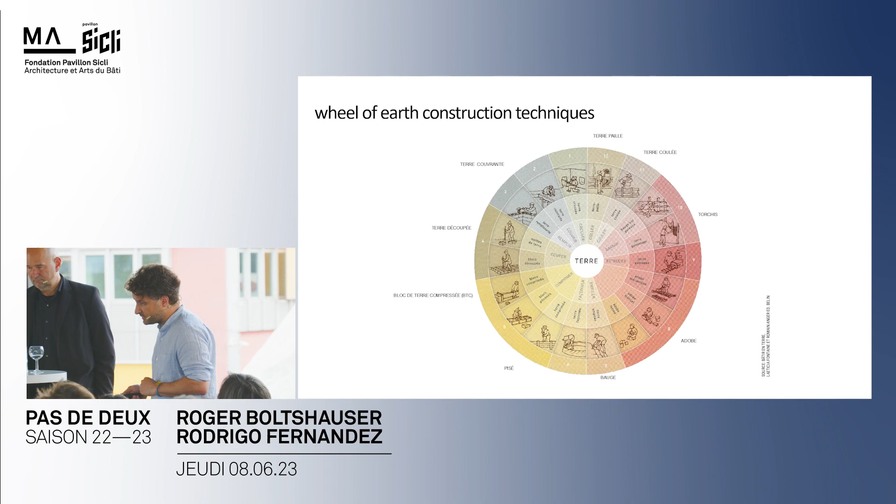Roger will talk about it, but we have good materials - sedimentary materials resulting from the erosion of glaciers over the last 1.5 million years that have come into the flat grounds. So we have good properties, a good particle size distribution with clays, sands, and gravel naturally contained in our earth that are extremely suitable for earth construction. This is actually a chance, something we really try to exploit.

Hello, thank you very much for the introduction. I hope we will do a good lecture together, because we just put it together very spontaneously, so we try to help each other.

So this is the course we do with our students from the EPFL - I was here in 2017. One point was what earth has to do with our culture, where it comes from, because when we did the Haus Rauch there were a lot of prizes, but there was also the question of what earth has to do with us, since we know it from somewhere else. Is it important for us in our climate zone? The second point was that earth is nice, but you can't do big buildings with it, so it has no potential to scale up - meaning it's not relevant, just a niche, nothing important.

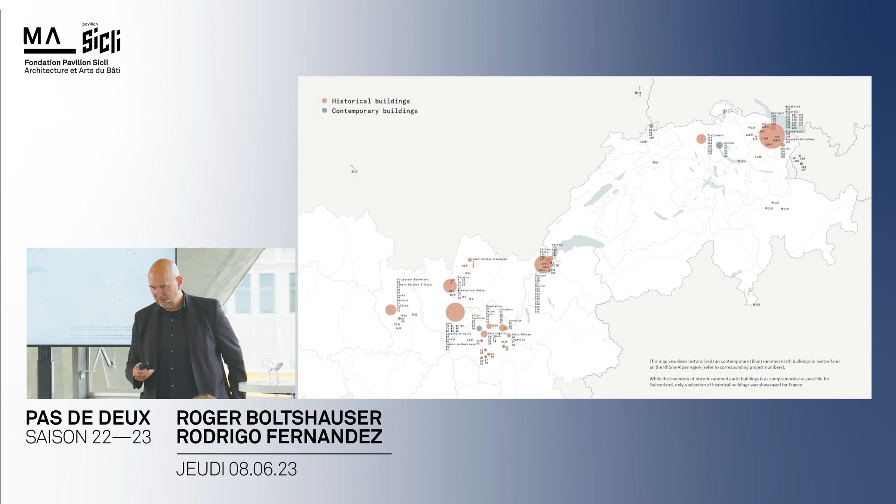Out of that we did a publication and a big exhibition at the EPFL, and we addressed the second aspect: we had an idea to scale earth construction up using pre-tension construction. That's the title, the cover title we did - together with Archizoom - a construction under pressure, with the idea of reaching a bigger scale out of the history of earth. You also see details we learned, like the corner details from Lyon showing how they stabilize the corners - little things we integrated.

Here you see a building we found in the region of Lyon - bigger than Ricola. The funny thing was it's around 200 years old, a farmer building still in use today. The picture is from around 2017. The people didn't let us in because they didn't understand why we were interested in the building, so we could only look around from outside. There are already guides who show buildings like that, but even the guides weren't able to get us in - meaning in a way it's forgotten, people don't understand what they have. We thought we had to do a publication - it's so amazing, so huge, and they did it by hand. It's an amazing building.

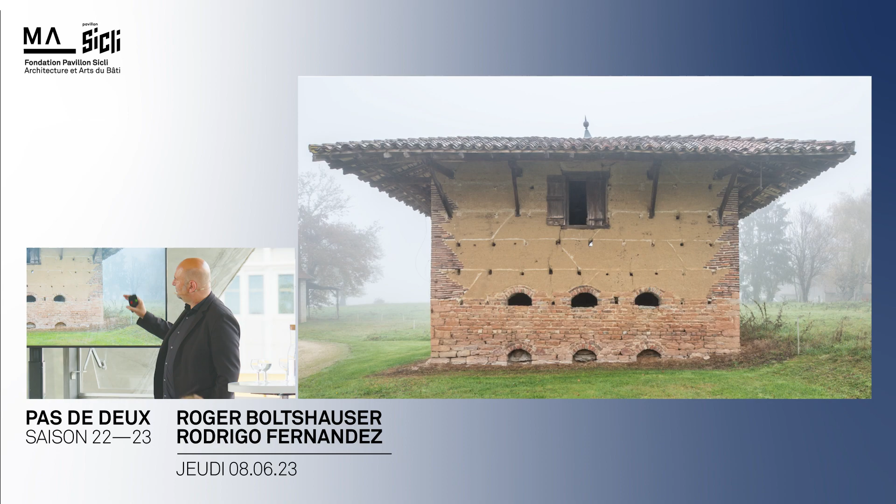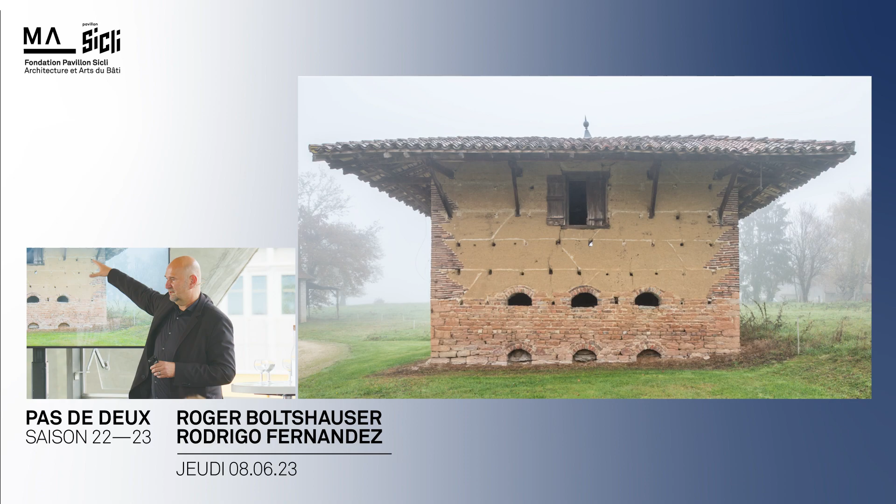Where is it better? This is a beautiful building, also a farmer building, also 200 years old - they keep pigs in here. But you also see how earth building is done in our climate zone: to have good protection you need a big roof, a stable base, probably nice corner details and details for the windows, and with that you don't have to cover the earth construction - it can survive 200 years. So if people say this construction doesn't work in our climate zone, I tell them go to Lyon and you can learn to study it. Of course.

They also have cuts, but in general the building survived there in a good way. So we were impressed by what we found. It's also extremely beautiful.

This is a little farmer house in Geneva, in Vernier, and it was also a funny story. Outside it's covered with plaster. We didn't see it from outside, we saw it from inside. And the people who live there didn't believe me when I said, 'Oh, you're great! You have an earth building. How beautiful!' Because the details, like how they did the formwork, it's clear it's an earth construction.

They said, 'No, this is old concrete, it's not earth.' But no, this is earth. They said, 'No, we had to take the windows out, it was so heavy, so strong, like concrete, we had to cut it like concrete.' We couldn't say anything, so okay, it's an old concrete building - but we believe it's an earth building, and they didn't trust us. We sent them a book, and I don't know what they think today about their building. But it's also a funny story showing that this construction is in a way forgotten.

And Geneva, beautiful.

Then we went back to Hauptwil. This is close to St. Gallen, a textile factory, 300 years old. We know that in the east part of Switzerland, everything is made with plaster. This is an earth construction here, but they go over it with plaster. This is a simple way to protect earth construction.

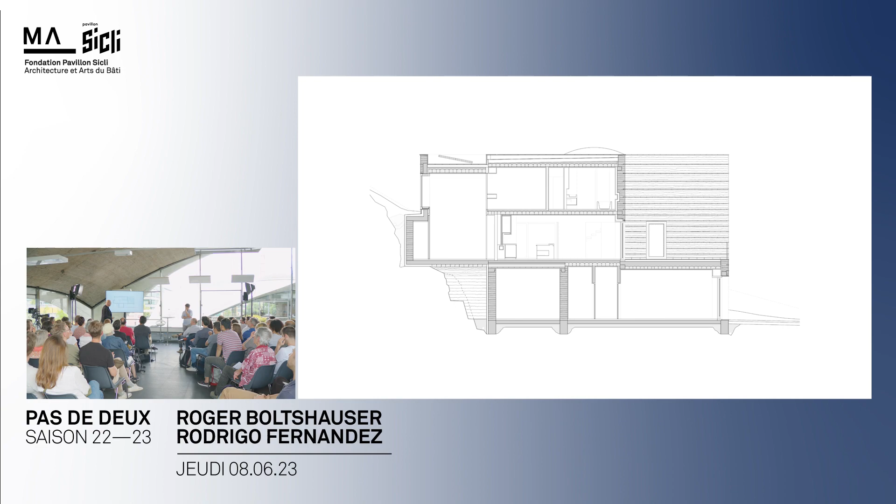One discussion was about not too many windows. He wanted to have windows everywhere. And I told him, Martin, we need these walls. I want to do one window per room. We have sometimes two. This one I didn't want to have. This is the only one I had to do because of him.

But in general, we want to talk about this wall and the materiality. So it was funny for us to talk with Martin, to tell him we need the wall and not the window, because you do walls and not windows. And the house is much better if it's more a strong piece of earth.

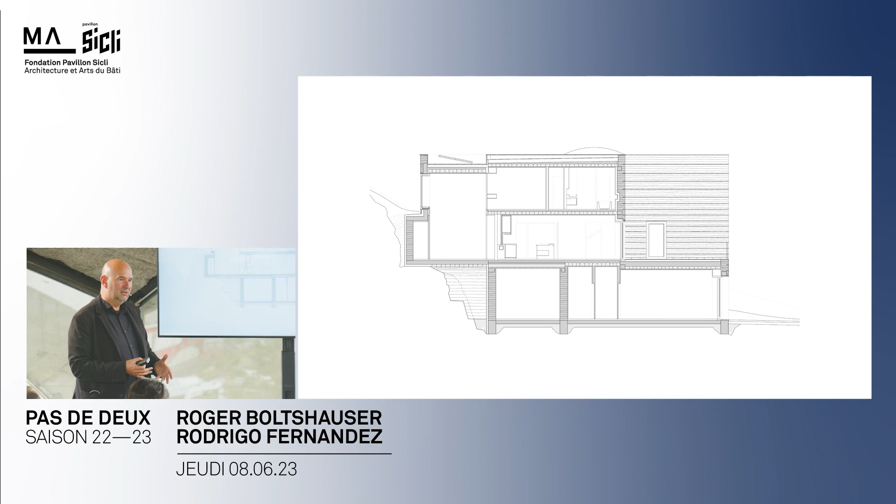So here we could really use the full excavation. This was great at the site. We did the excavation and we put it one-to-one into the house. You have so many cubic meters that you can use it also for other projects. But the mixture in Schlins, in Vorarlberg, in Austria, was perfect to build one-to-one in earth.

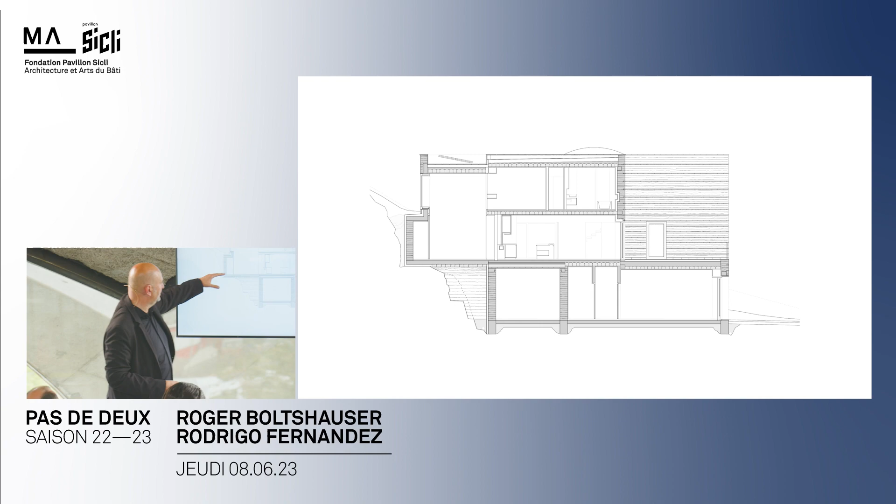The ceilings are made in wood; these are like real trees. We just cut them on the tree side and put them in. They're from the forest next to it. So it was really a big issue to use local material, don't use any plastic, nothing. We wanted to be as radical as possible.

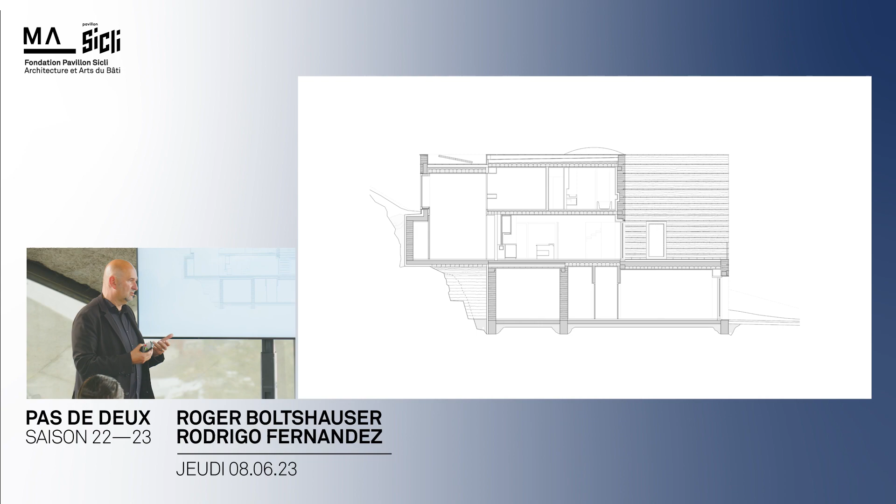Of course, for both it was very important to really make a statement. For him, after 20 years building with earth, to do the best he can out of 20 years of experience, and for us also, and of course we learned.

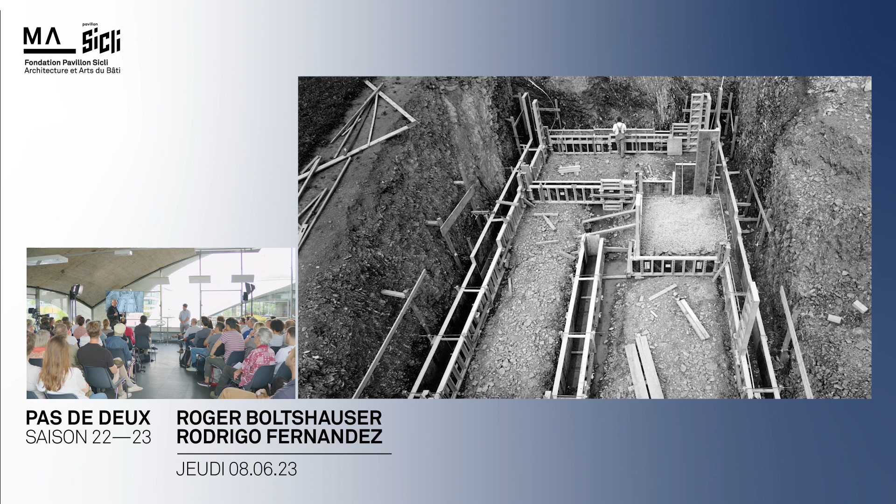Yeah, the building site, you see how you do earth construction. The frameworks are stronger than normal frameworks in concrete because the compression you have with the material gives a lot of force to the framework, so the construction has to be stronger. So it looks like a concrete framework, but a more stable one.

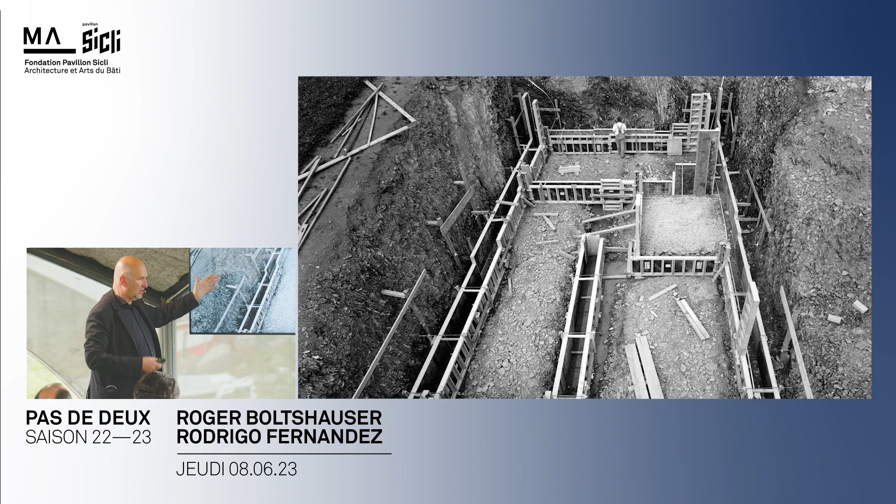So we came out of the foundation, we use earth. We come from the bottom, we use earth walls also, but we have to protect the earth wall from the water. But in general, it goes down 3 levels in earth. So this is the construction from outside. Inside we use some kind of straw insulation, then we plaster over it.

And what we also did is this layering. We want to do an abstract surface. We want to have the body. And this is a kind of reaction to have the water under control. This is a kind of dripping nose so the water can drop, so we try to save the surface in another way. He also did this system in his atelier house, which was older. So we made out of that the concept for the whole house, not just partially.

And we also played to have a better ending, a little bit more narrow in the middle, and then again a larger scale. So we really try to do architecture out of that. It's not just functional, it's also a design aspect.

And also the window, which goes deep. We want to talk about the construction, how deep the construction is, and we want to create a relation between inside and outside. This is the reason why we developed these window details.

We have different temperature zones in it. The staircase is not insulated, so because it's thicker, we have these round shapes. So we have the temperature plus minus under control. At that time, we didn't know exactly how good earth really is. So we just tried, because the insulating part is when you go into the different floors. If you go to the rooms, you have the insulation, but in the staircase, it's an in-between climate. The temperature difference was much better than we expected.

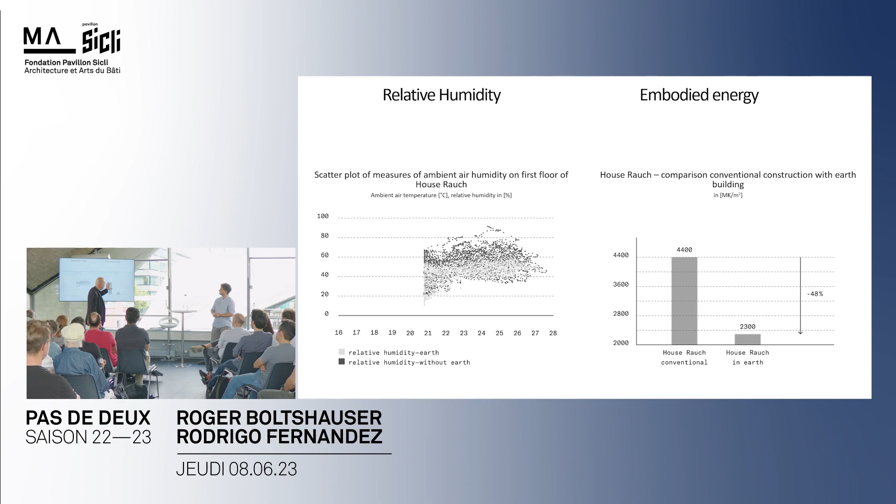After that, we started to do some research with the technical school in Lucerne, today the University of Lucerne. We wanted to know, because there was no real gray energy number. To be honest, this is really calculated, because Martin did all the calculations. Every shovel he measured, he really wanted to know. Every day he wrote it down in his book.

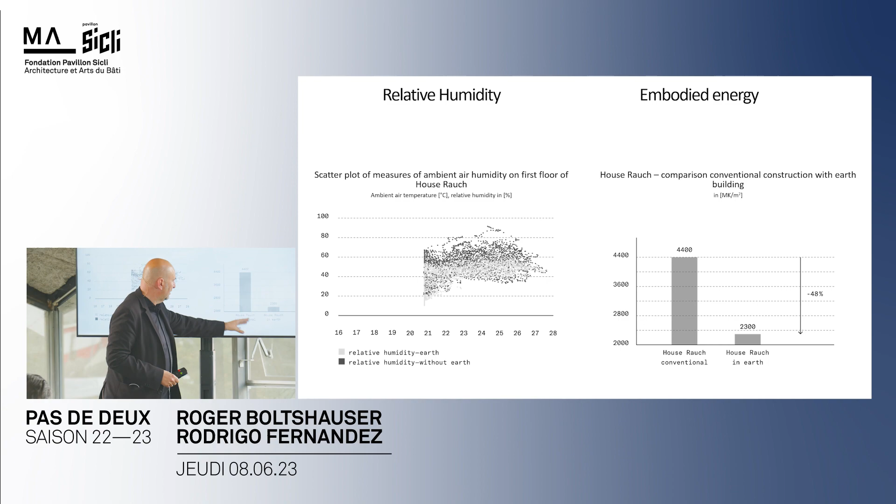Compared to a normal conventional brick or concrete construction, we save 50% of gray energy with this. We expected a little bit more, but with the real calculation, we also had machines and all the stuff. We came to a little less than 50%.

And we also found out that the humidity is in a very good range all the time, because earth construction regulates humidity, compared to a normal house. And we found out that earth could also help to have less building equipment, because you can regulate the humidity.

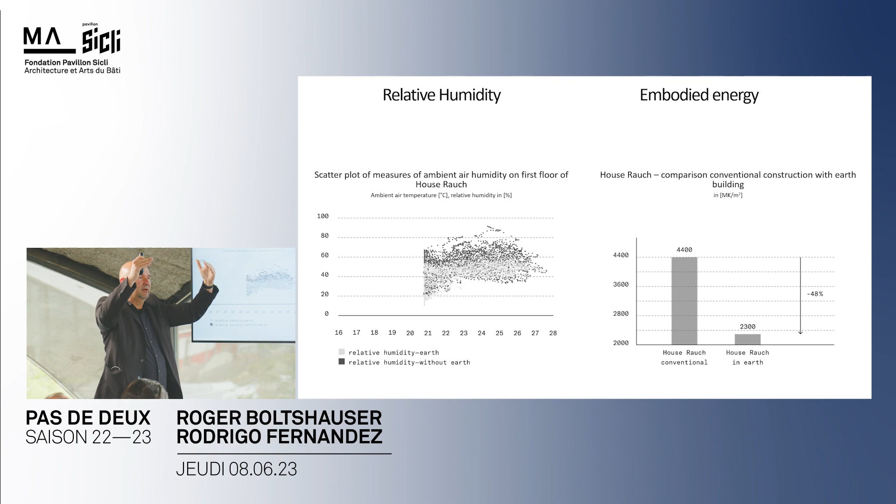This is something used today in hospitals: you can just do earth plaster, and you already have something which regulates, and then you can save energy. So we already have this energy aspect in that construction. Later we did much more with this aspect.

Yeah, it's your turn now. Too long? A little bit. Okay. But don't worry. Too many stories. We have a lot to say. I will be faster, don't worry. Okay.

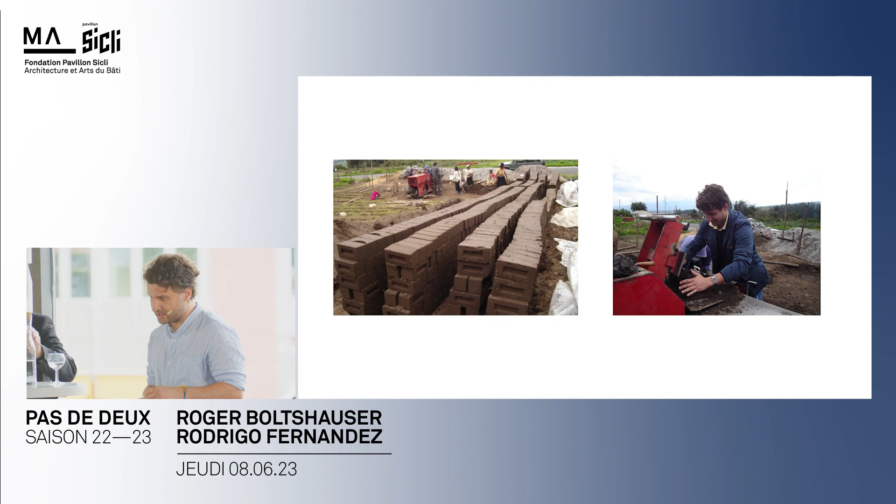Anyway, so we are now stepping into action. How did we actually start with these earth blocks? I had the chance for my diploma project, at the same time as Haus Rauch, in the 2000s, to go to Africa to work on these blocks, to discover this technology from an engineer's perspective, a material scientist's, looking at the properties of different soils, and so I had the chance to really learn from these experiences in Africa.

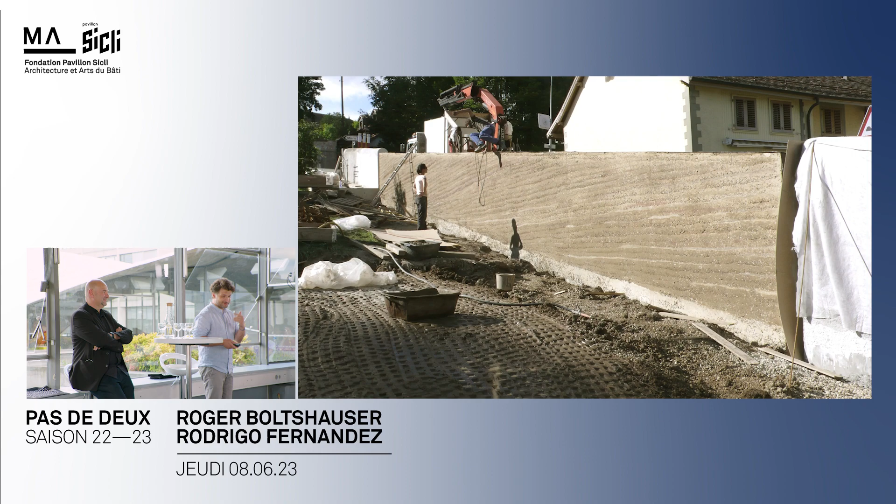This is an experience that Laurent, with his former architect's office, Terre, here in Geneva, did. This is a rammed earth wall, and he invited Martin to do it, in the same years that he was doing his house. He came a few days to Geneva to do this wall. And we learned a lot from a very small construction, modest, but still very beautiful and still standing.

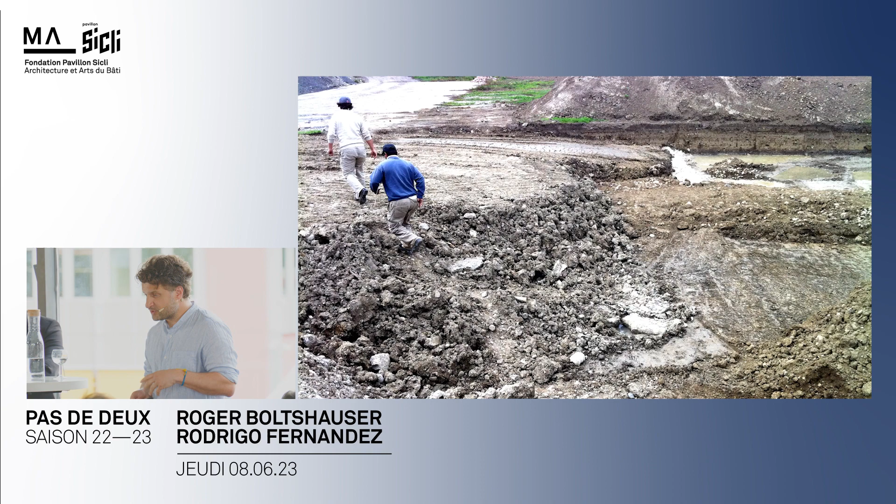You can visit it. So the idea really was to learn, now from local materials, and to start pressing these blocks with some funds from the state of Geneva, which had given us a prize for sustainability because we presented the idea of compressing earth to make blocks, rediscovering this technology. And we had the chance to build with Laurent's former Terre office a first construction in Vessy, la Maison du Futur, where we did our first blocks and first 200 square meters of compressed earth blocks.

And this is the result. So we were very proud. We took a lot of security, as you can see. There is a good basement. There's a big overhanging roof. There is a bit of cement in the blocks. So if you go there, it hasn't changed in 7 years. But this is how we really learned.

And we also had the chance to organize here in 2017 l'Art de bâtir la terre, invited by les Monuments et Sites of the city of Geneva, where we invited all the practitioners, all people in the French-speaking part of Switzerland to teach and to show what they could do.

So it was a very interesting 3 days with conferences, and we had the chance to receive Roger as a lecturer. And this is the first picture where we meet, and we talk about earth construction, and he talks about his experience, and it was a fascinating moment. And from then on, he started to design also with blocks. So he had this huge experience with rammed earth.

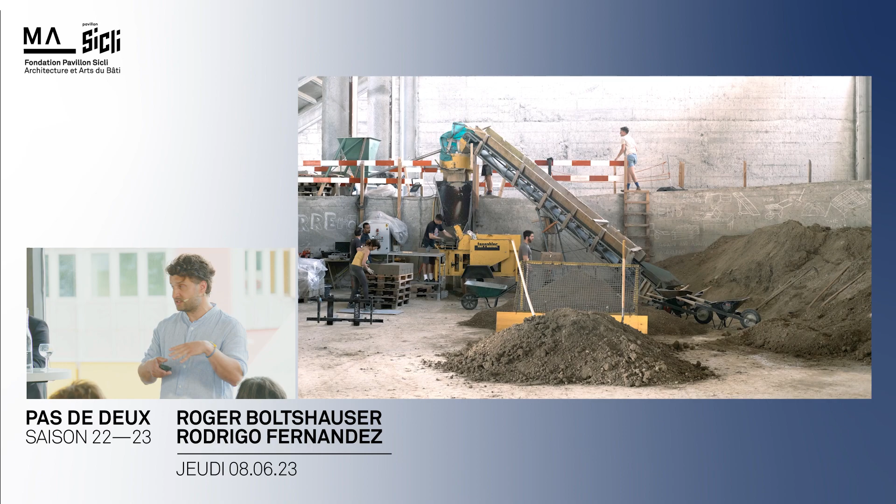And there you see the earth coming to Brunnen and ready to press with the machines, with conveyor belts and stuff, and I want to show you a small video of this moment where we were during 3 months, also with students from Roger, students from us, from Fribourg, and with Felix in this ancient cement factory, producing the blocks and producing also rammed earth.

So sorry, it takes a little bit of time to load. I'm not doing advertising for it. It just takes a little bit of time to load, from what I've heard. Yeah.

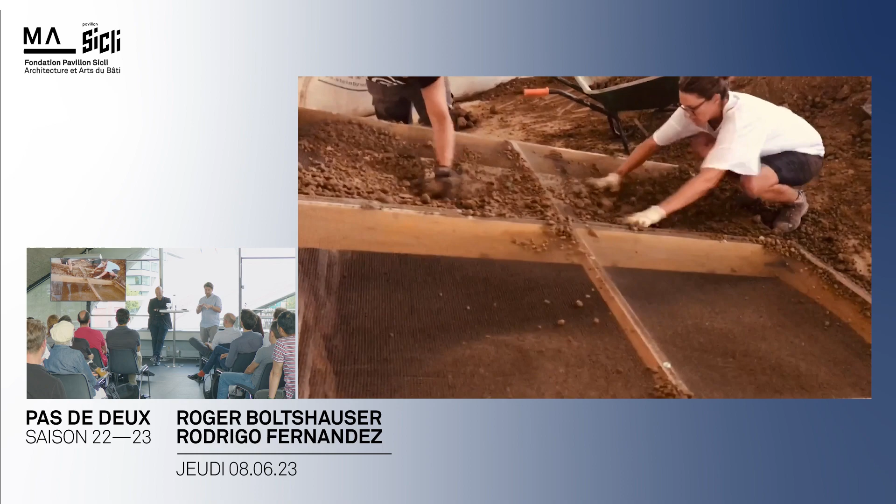So there we are sieving the materials for the mortar, because we are putting 30% of fine earth into traditional, conventional lime cement mortars to do the joints between the bricks. So this is the sieving process. It takes a lot of time because you need earth that is very fine, maximum 4 millimeters. But we only had to do a few big bags, and then you see we had like 150 cubic meters that came from the construction site.

They were supposed to be already sieved, but we had big lumps, so we ended up doing a lot of handwork to actually break the lumps, remove the lumps, and we had a prior sieving process that you see here, this time not for the mortar, but to produce the blocks. So there we see Felix doing the sieving part.

Have you seen this video before? No? Okay. It's the same movie maker. Sorry? It's the same movie maker. We did. You have another? No, it's not the same movie maker.

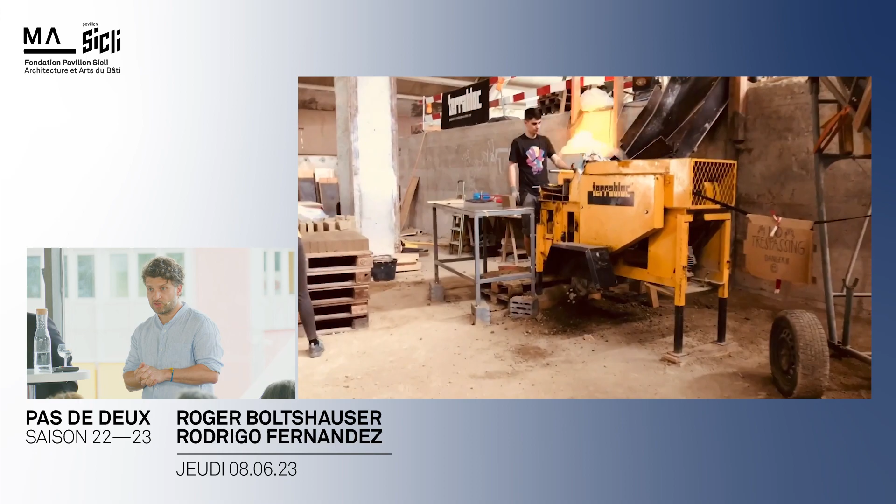Anyway, so there you see that it's really actually time-consuming, and we produce from this size of block that you will see around 1,500 bricks. That represents more or less 50-60 square meters of blocks per day, producing like that. And we are protected from rain. We are in a perfect site. And this is the small press that's still working today, that allows us to build as simply as possible. So this is the mix going up there, falling from the mixer, and we'll see how he presses, and then we'll go on.

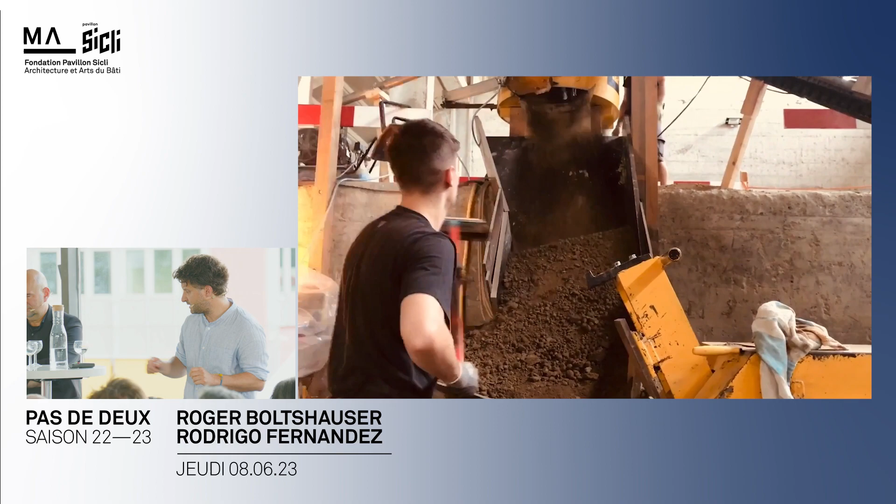So this experience about really sharing our knowledge with Lehmag, with Stampflehm, we were also doing rammed earth, and at the same time we were producing the blocks, and all these blocks were produced for two of Roger's projects that he will present.

Okay, so now it's your turn to talk about what you did with these bricks. Yeah. I think we also invited you to the EPFL, so we had a discussion about this at the same time. Yeah, it was also part of the discussion and exhibition at the EPFL, so it was really the starting point, 2017, and also here was great.

So yeah, we found it interesting to go on with other techniques, but in general it's the same but smaller. We have to say it's a little bit easier to sell earth blocks than whole pisé walls, because, and it's stupid, but in a way it's a simple aspect: if they are smaller, they really look like bricks. So the way to the client is a little bit shorter than if you say I want to ram.

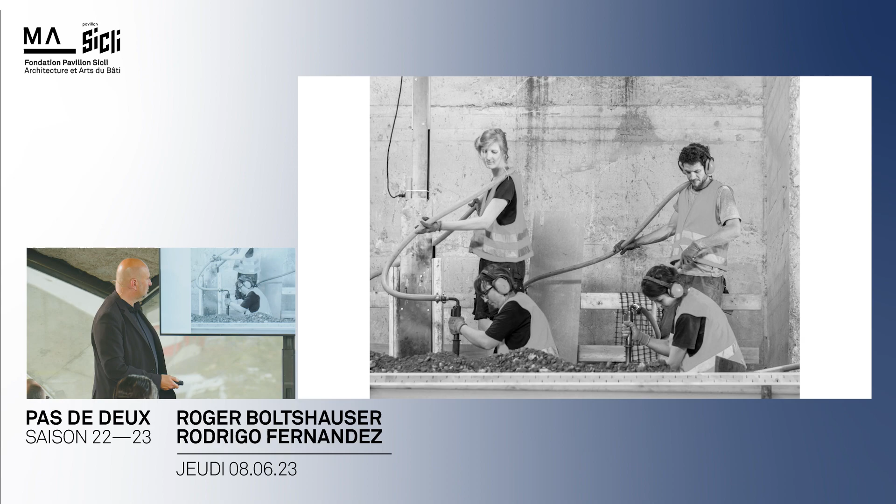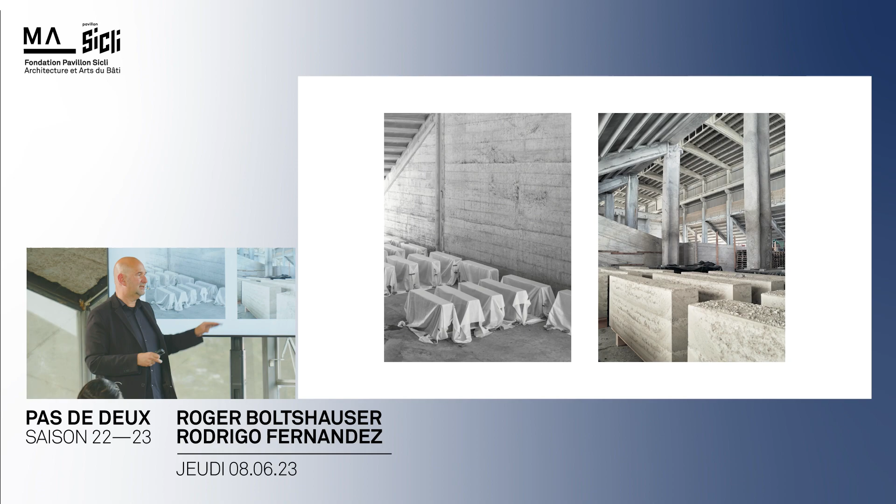Oh, it's already the construction site, so I'll go back a bit. They don't only want an old brick factory; they also want to talk about material. They make bricks, and they asked for an unburned building. They saw our mock-up at Sitterwerk when we produced it and had the idea to do something there. I took this project from the EPFL to TU Munich, and they wanted a kind of tower from which people can see the whole protected area, a beautiful landscape, a building that looks to the future, not backwards.

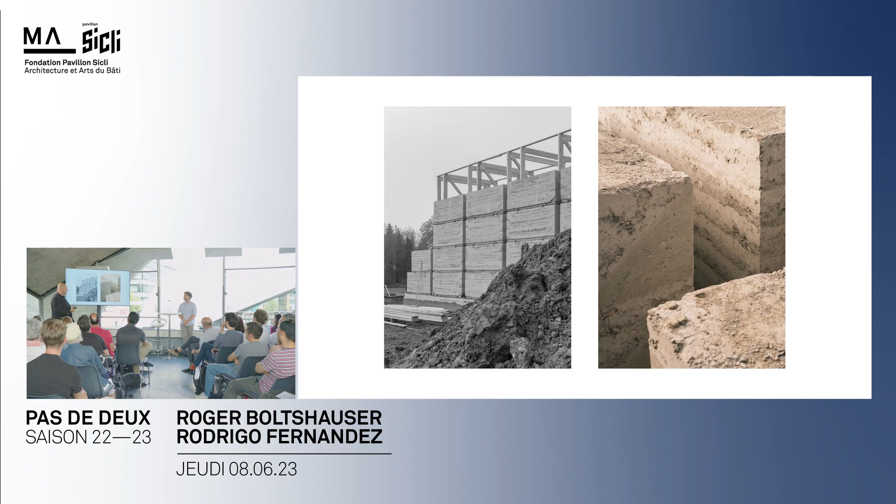What we designed is also this pretension construction, again a learning from the EPFL. We prefabricated these rammed earth walls, and we also used Terrabloc. You see how we produced the whole building only with students: 30 students in Munich, then I moved to the ETH and another 10 to 15 students worked on the plans, and another 60 students worked on site producing the big blocks and the smaller Terrablocs.

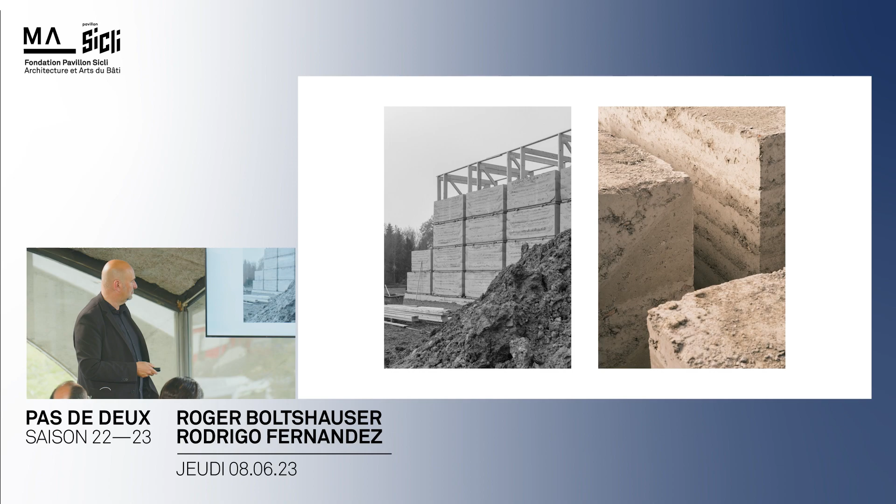After producing them in Brunnen, we built it very fast. In 3-4 months the building was ready, made with this pretension construction. Here you see the learning of EPFL and of St. Gallen Sitterwerk: each element stands on itself. I will talk about the problem later. The pretension didn't work so well at the first mock-up in St. Gallen, because the construction shrinks a lot.

So we always have to do it again to make that stable. And here we have some kind of springs which permanently bring some pressure on the construction. And the idea was also already in the EPFL to attack the second point. The second point was this building, this construction, it's not an answer for density, it's not an answer for a bigger building. So we try to do a construction which comes to a bigger scale.

So we have here a building, it's 9 meters. The EPFL mock-up was 6 meters, and the construction really works. We measured that, and we calculated we could come up to 40 meters. It doesn't mean that we have to, but we want to talk about the potential of earth construction. And today with this earthquake aspect, Yemen is 7-story high, but it's not an earthquake. In an earthquake case, it doesn't work with our rules, but this would work with our rules.

So really to attack the scale and to say it's important that we go with this material, we will find a way, even, to be honest, when we are still at the beginning, so we did that. It's a kind of big mock-up, but it's also a platform to talk about the surrounding. It's a beautiful space, and it has an oven in it. And the oven is a kind of second layer, and this is made with Terrabloc. So here we did something, a combination.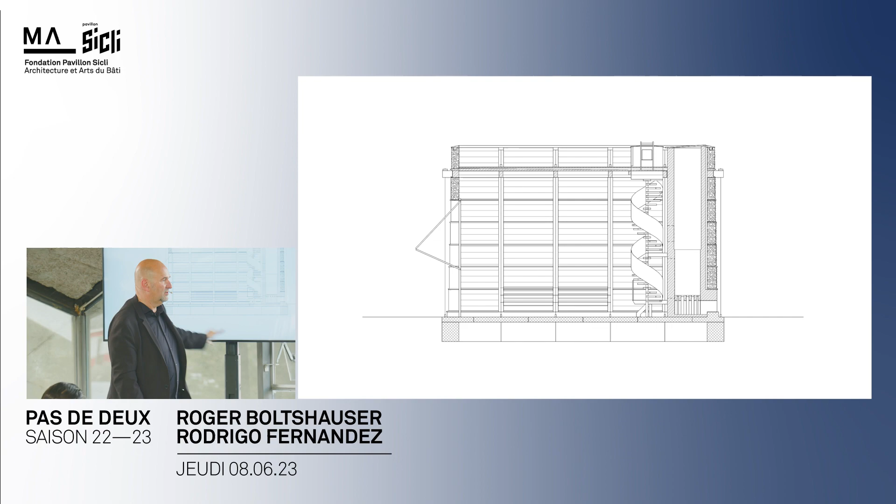We found it also beautiful to have both materials, kind of oven, because the old oven they have in the old factory doesn't work anymore because it's a wood building and the fire police doesn't allow them to burn, so they can do no schooling, nothing. So the students from Munich had the idea to do that so they can burn stone also to show how it works. They have the material there. And they also have an unburned building. So it's really about the past, and it's also about the future, and it's with Terrabloc here.

So this is also interesting, the circularity as an important aspect today. Because normally, if you talk about circularity, it's light building, it's steel and wood, it's not earth. But we find it very funny to have a very heavy building which is circular. And so we did it, and also the pretension construction helps to make it circular, because each element just stays on each other, and it pushes it down.

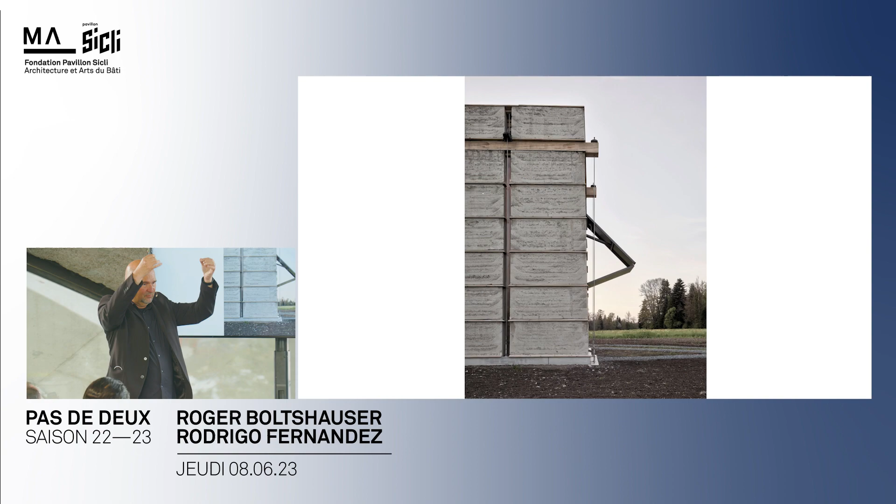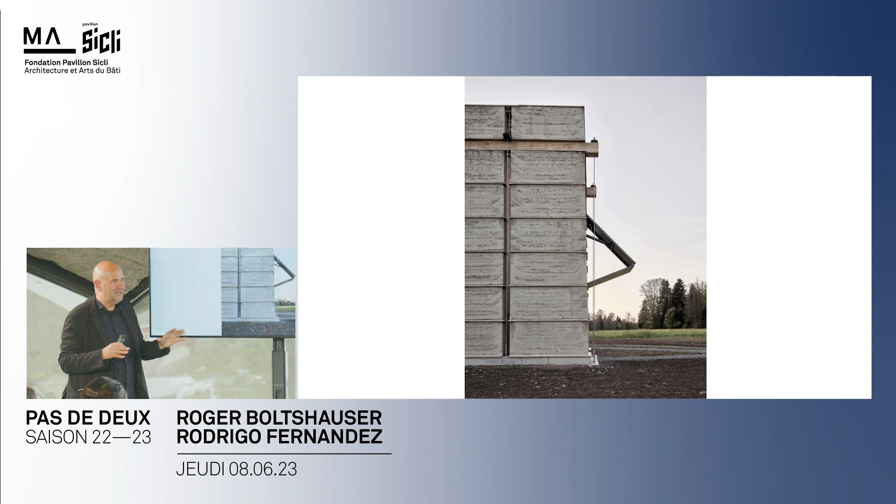To be complete, in the EPFL we have Terrabloc there, but we also have Martin Rauch who supports us with this idea, and we have Jürg Conzett. And Jürg Conzett is a specialist of pretension construction, and maybe you remember Hanover, the pavilion from Zumthor, with the wood layers and the pretension construction. In a way, it's the same system. So he was completely excited, but the idea comes from students, not from us. So Burgi, a French student from the EPFL.

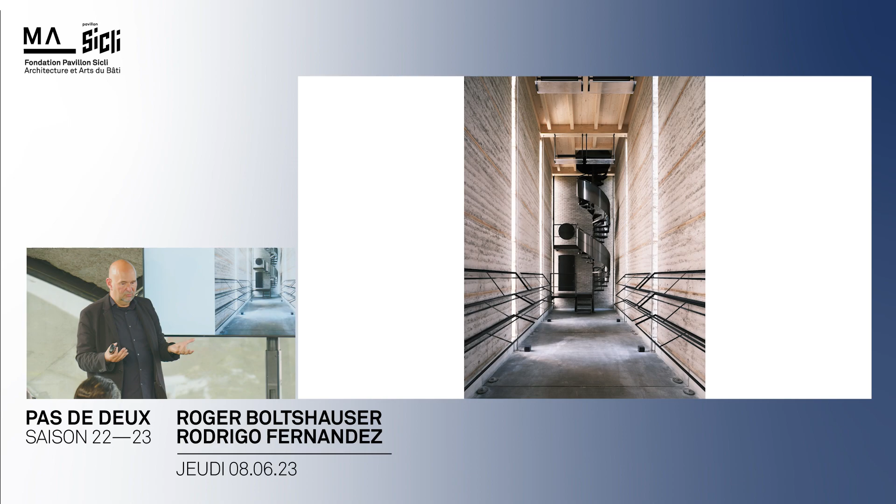So inside, you see the Terrablocs, the way up, and we use the cable also. Both sides there are cables. We use them to do also the exhibition, so we use them in several moments. And you see all the foundations, we just put them in. We have some nails there to take it out, so everything is circular. Yeah. Oh, it's still my run.

So the second project is a newer one. You know, this was a kind of special project. We have a great client who just wanted to have that because we have a brick museum and we have a big fundraising. The government gave us money, so it was kind of, you know, a special frame to work in. Here we have a housing project in Kilchberg.

You talked already about the earth. It's in an upper segment. If you look down here, you have the Lake of Zurich, so it's very high. It's an expensive community there. It's an expensive place. You can save a lot of taxes if you live there.

It means the rents are very high. So we had the idea to do something in earth, and we did a combination with earth blocks inside. We did a double layer construction with a reuse brick facade outside.

The structure and the roof are in concrete. You have some concrete columns, and the fillings, the double layer construction, is earth and reuse bricks. And the excavation we use is from the site.

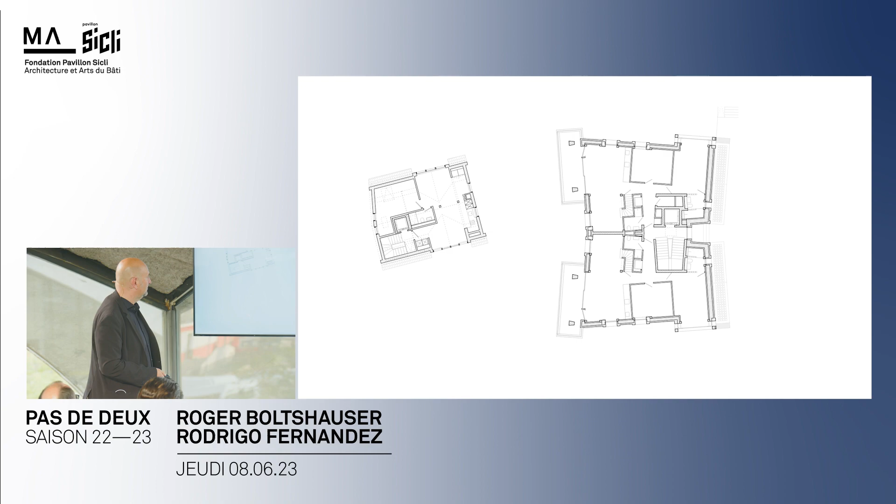So, and this is the result. You see the Terrabloc, you see the structure, and of course we have some loam ceilings with plaster. So we integrate it, and I have to tell you, after 2 weeks, everything was rented out. So we were, yes, the people are ready for this construction.

We don't have to be afraid. And even if the surfaces are a little bit special, we have to tell them the nails have to be not in the stone, they have to be in between. And with all this aspect, they like it. And they're proud to be there.

And it's nice that this material comes really to the people, and people like it. So it's not something like freaks like us who just like to work with that. It's really something people want. And this is, I believe, the result.

So now, with this small project of 7 flats, we show all the clients we have and tell them: look, it's possible, you can rent it out, it works. And we attack the bigger scale together.

Again, the sleeping room. Of course, we have some special details, you know, because we can't do that in the wall. We can only do 20 centimeters, and you go out, but it's also beautiful. You can do architecture out of that.

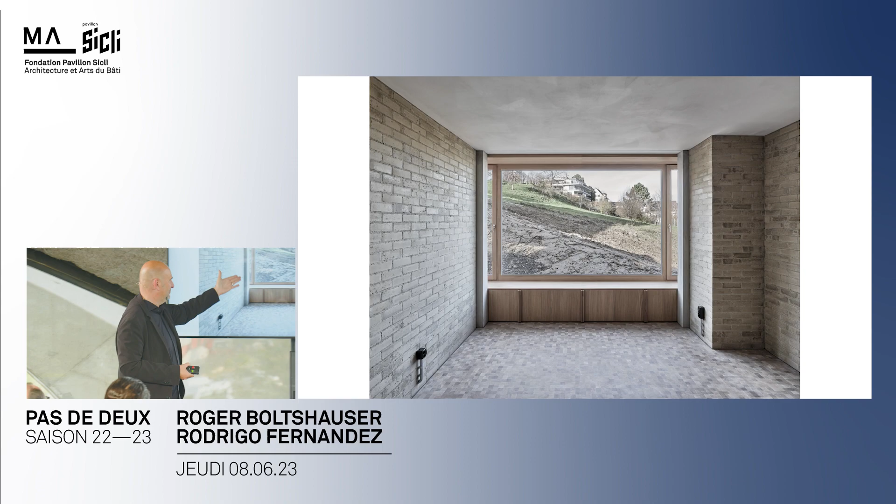And this is the material, and this is the wall. It's extremely nice. Kilchberg is such an expensive community, but you have the perfect material to build in earth. It's also strange in a way.

And we also did the staircase with earth, so there was also a discussion about whether it's too fragile, you know, if you go up, but we thought it's a beautiful atmosphere we can create with this material.

Yes, and again, the top flat which goes to the roof with these earth blocks. And it's a kind of Maison Dom-ino, you know, Le Corbusier, and then you do the fillings, and it's the same system.

It's not the Haus Rauch in that sense, it's not that radical, but it's a way to try to do a smart hybrid construction and come to the client. It's really coming to the market with this material, and in that sense, it's really a try to come closer to the market and closer to the client. So still for us, after building Haus Rauch 20 years ago, it's still a big step.

And this is probably also important for you to know: it's not easy, it's not a home run, you know, to go on. No, but we are there, you know. We will show the bigger ones now. Okay, it's your turn.

Thanks, Roger. So now the chapter on how to democratize. Well, you've seen this handmade production. This took time.

This takes energy, this needs money. We had to hire students to do all the blocks, and people cannot always afford producing blocks on site. It needs to be really a collaborative project to make handmade blocks. So actually we were struggling, financially struggling to try and make something run and democratize this product.

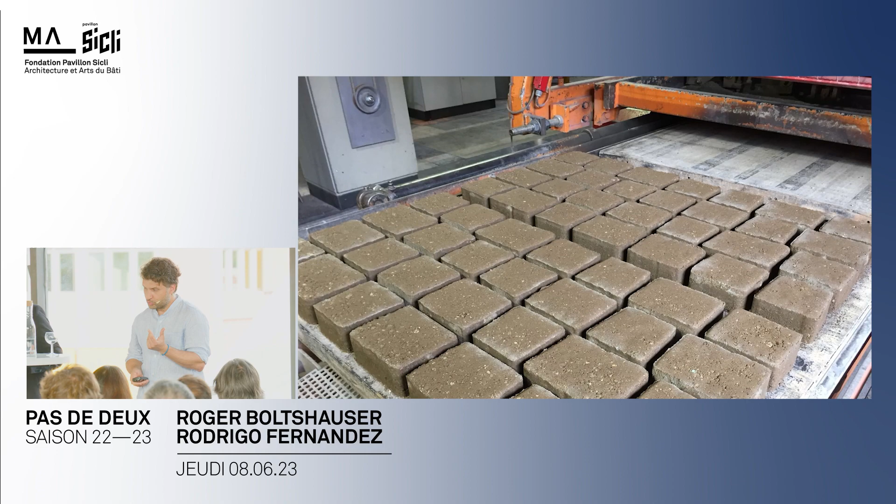We had the chance to meet a family-owned company, so we decided to try with an industrial factory. It's a press that makes pavements to make earth blocks, and it worked. Then we could invest in our own forms to make compressed earth blocks, and that was very important for us.

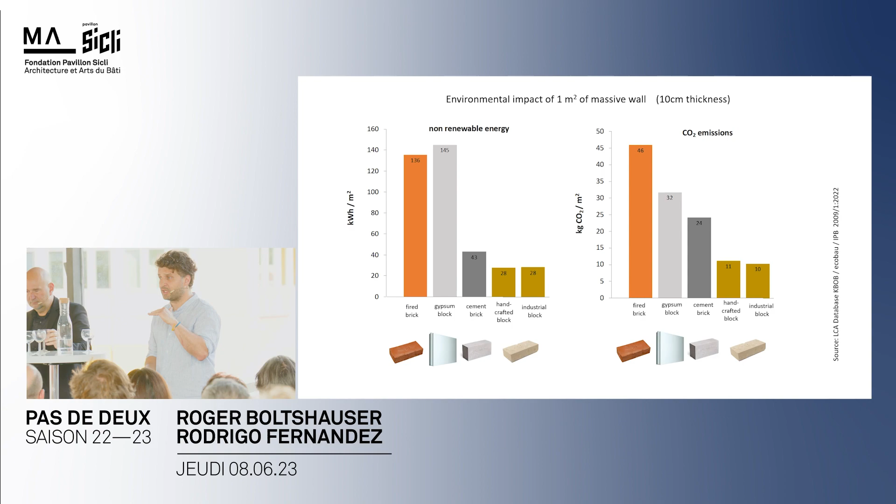We wanted to show only these two things: this is the life cycle assessment of a handmade block, and this is the life cycle assessment of the industrial one. This is in non-renewable energy, and this is in CO2 emissions. So for us it was very important to show that by upscaling the production, we were not moving in terms of environmental impact, and we could scale up.

The gain you have in production per day in yield, even if you consume more energy per square meter of wall, it's the same. And so it opened the door to different products, opened the size of the bricks to make load-bearing walls and more complex shapes.

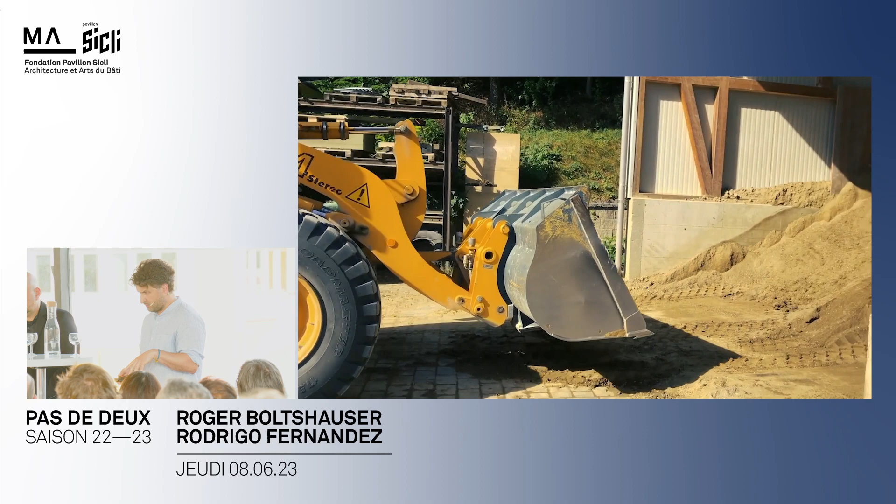And this is how - I think I will skip this video, because this is just what you show when we produce industrially. Shall I keep it? No?

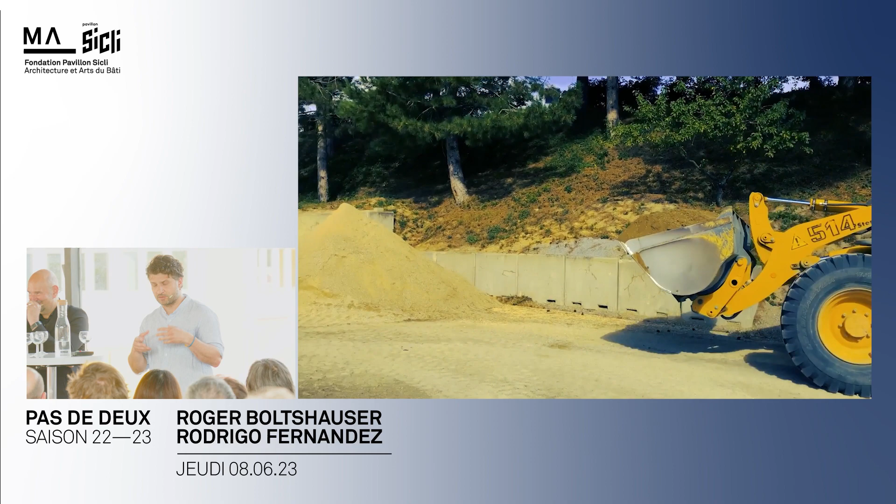On avance? Okay, so this is how the excavated materials must be sieved and prepared. So what you see there is a bunker where we have 300 cubic meters of earth. This is our stock, and we need to renew it with local excavation. And it goes down in the factory as if it was stone to make a concrete pavement, actually.

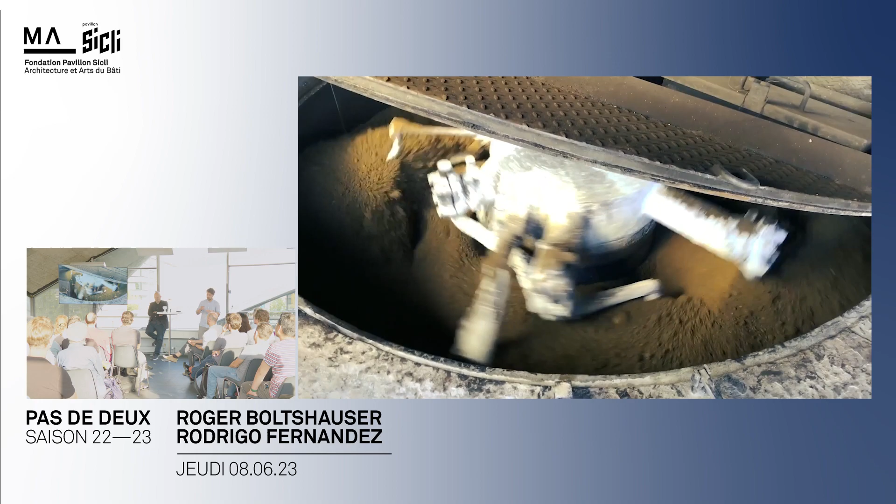And there you see big vertical silos. We cannot fill them up, otherwise with earth it gets stuck. And this is the mixer where we put 3 to 5% cement, depending on the application. We put a bit of stabilizer, we put water, and then it goes through a conveyor belt to this machine.

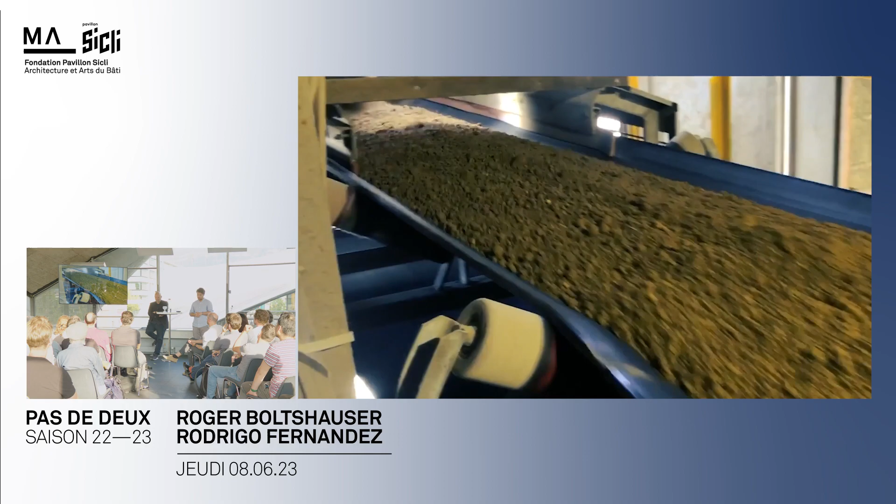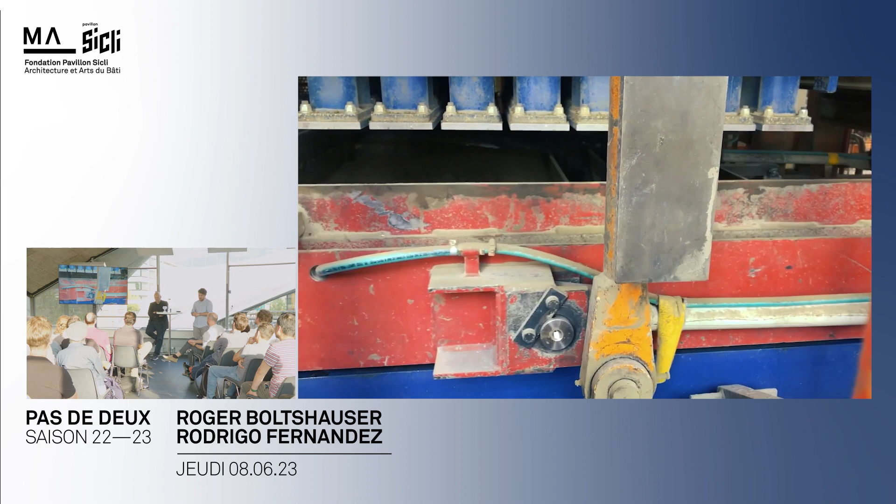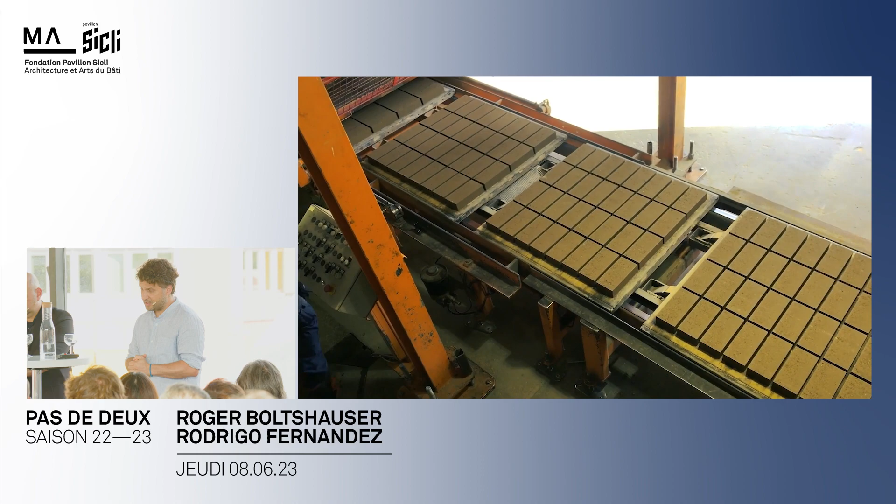And this is how it vibrates. The technology is a bit different — it's a vibro-compaction. It's not only pressure, it's also vibration that rearranges the particles to make them denser. And there you see the results of the blocks coming out. Basically that's the way we are able to produce now, to try and democratize.

And what you did again now with these blocks, you can show us. We are really one of the first who built with them — not really, nearly close to. Let's say in the German-speaking part, yes. Okay, so we have some good architects here that already built with our blocks.

We found this technique of the double skin facade with Terrabloc inside and brick outside. We found it interesting, and we really went to the market. We designed this house here — a very small hotel next to the station of St. Gallen, together with the company of HRS, which you know here.

It's a really general contractor — we're just under them. And it's also for the Pensionskasse of St. Gallen, so it's really a serious client. We want to do something special with them, so we asked them to do a double skin facade with earth blocks inside.

So we used this Terrabloc, and I believe it was the first time. It's also 35 meters, so it's a skyscraper, a small one, but it's a skyscraper. It's the same principle we did in Kilchberg. This is the structure outside — again a concrete construction. We have this double skin facade, and we have many inside layers.

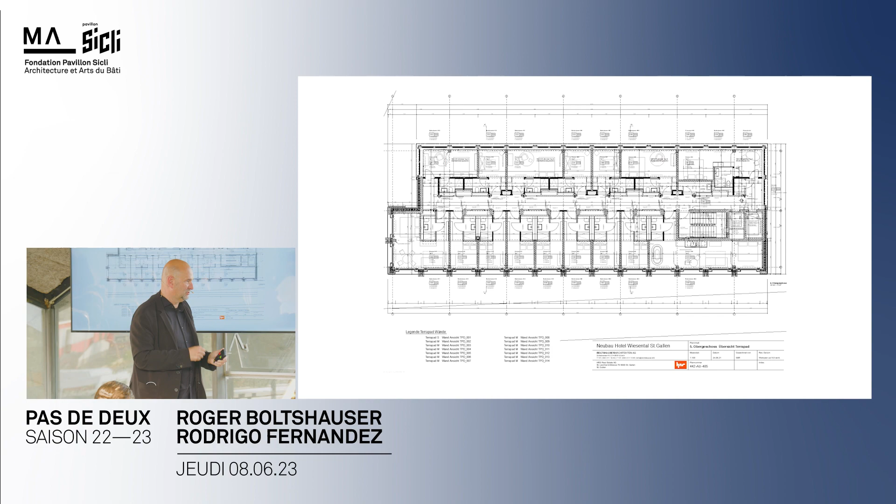And we have young hoteliers, around 35, who really wanted something special, something new. They helped us a lot to go with this. There was also a big fight with them, but on the other hand, they helped us move forward with this material. They were ready to go for that.

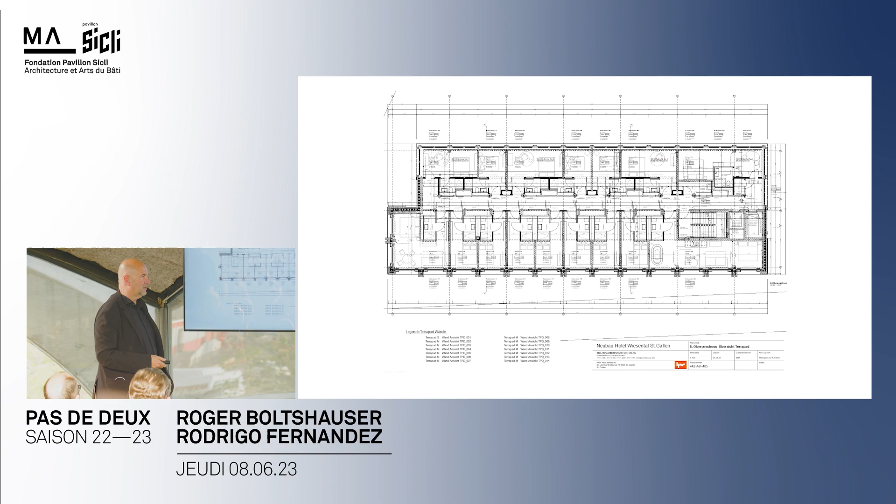There are 100 rooms, and they all have Terrabloc inside. This is the lobby, it's close to finish now. We are 2 months away, and then you can book rooms there. The rooms are sometimes very small, because they want to make a lot of money.

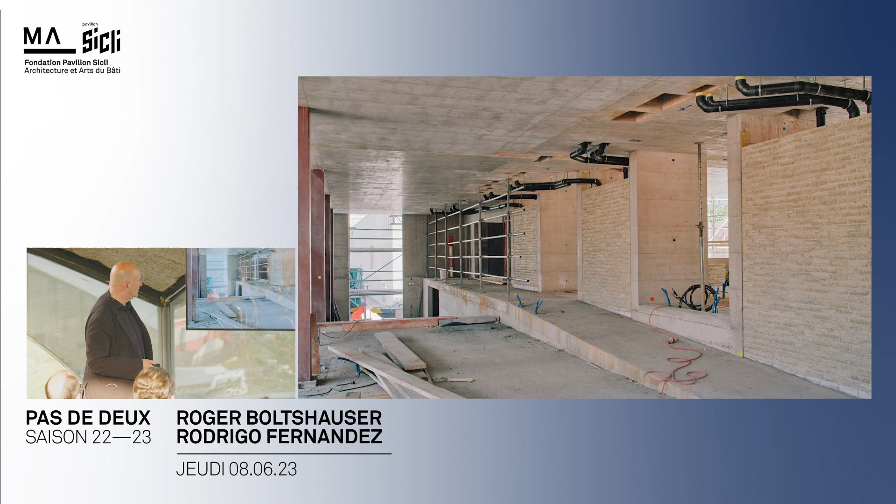You can see the construction site, next one. Here you see how we did it: down we did the normal format, and in the rooms we did the bigger format. It's of course a filling, but these are the rooms we want to create, and we found it beautiful to have these walls.

The Terrabloc are really like earth blocks. You see this also in the factory, how strong they are and how beautiful they are. And this is real - these are the real rooms. This is not a rendering anymore, these are the real rooms.

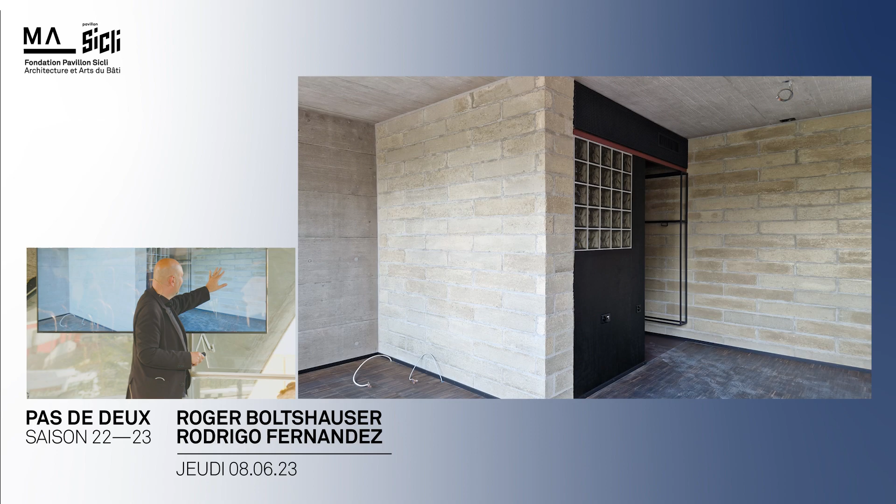We have a lot of fights there, because the products, if you look one side it's a little bit cleaner, and if you turn it's a little bit more bubbled in. So there was a big... can I talk about that? Yeah, of course. So the client was saying, no, this is too much, too many holes. So we went there and we really worked by hand.

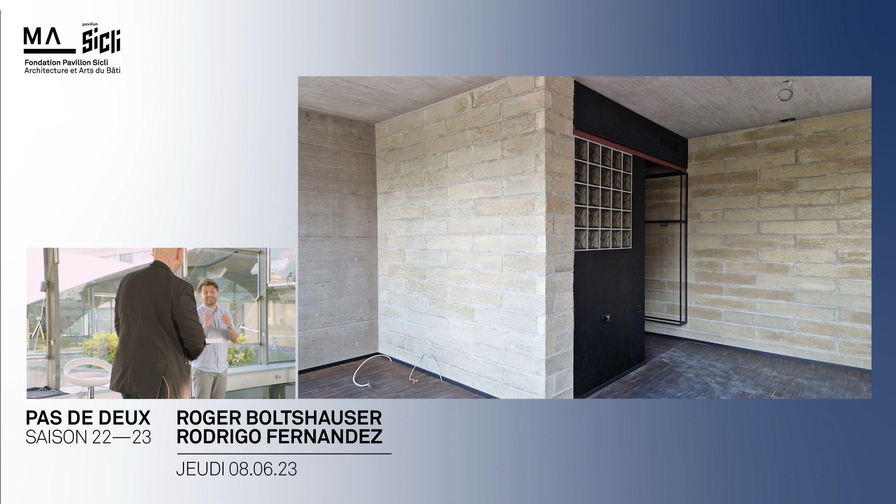That's because our mock-up was too nice. Our mock-up was too nice, and so they were saying, this is the mock-up, this is what I want to see. But when you go from 1 square meter to 1,000 square meters, it was another story.

So we did a lot of handwork here to finish this together with Felix, together with all the earth helpers. We wanted to make it possible, and at the very end we wanted to show the walls. And we came through, but it was this process of upscaling.

It was going to the factory - I think already you can do it better, you learn out of that. I hope so. And we tried to make it possible at this scale, and it was a fight.

Of course we showed the most beautiful walls you could do, and of course at the end there was a discussion, and in between it was not so easy to bring it through. It was a discussion about costs - is it less? Did they pay too much? So it was a hard fight.

But I'm really happy that we are at that point, and that you can rent that now if you go into it, I think, some will.

Need to be a bit faster to finish now, Roger, because people are tired of earth. Really? No, I'm not sure. No, I'm joking. But this is again you. Ah, it's again me, okay. Yeah it's about... okay, I'll go quicker now.

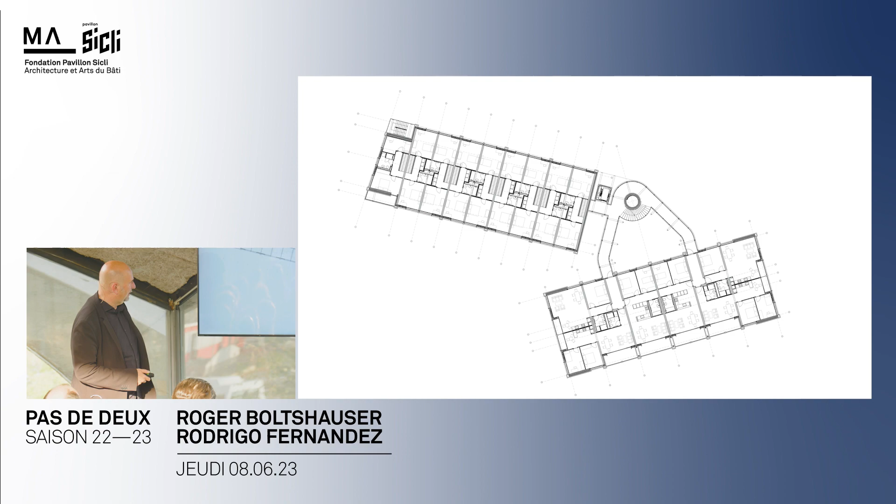And yeah, we struggle - the client is struggling, but he likes it also. It's a beautiful house, a housing project with 2 sides, a beautiful connection. We also like, again, this aspect of architecture - at the end it has to be good architecture, it has to be something in a good dialogue.

We like this filigree quality against the mass. This is something we try to develop - we had it in the House Rauch, we have it here. So this shifting between mass and lightness is beautiful with earth, and also of course with Terrabloc.

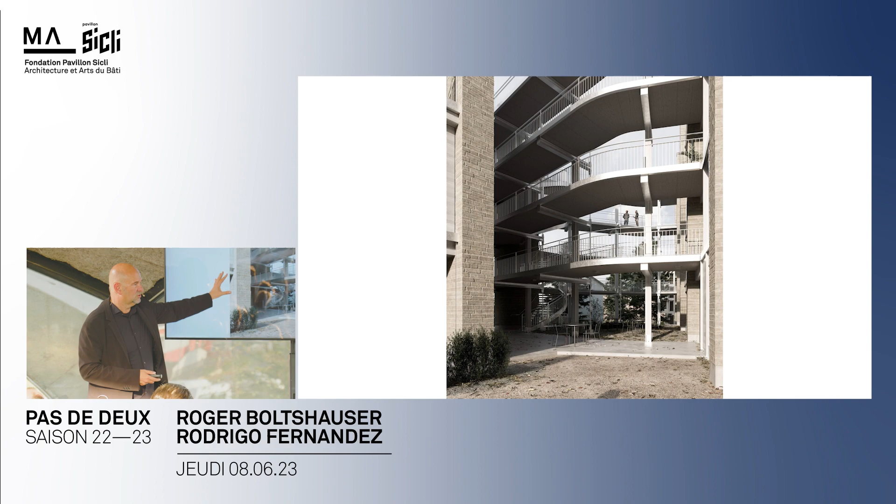So I'll go quicker - the inside could be like that, and we hope we can really do it. And then we go even bigger - we go to 300 flats that we want to do in earth blocks. We have 6 houses, so at the end we have to split.

We do one part in wood and one part in earth blocks. And it's still a big fight with the client to go on. We still have earth blocks in. We have to reduce a little bit because there's Swiss Life, there is Habitat, a kind of Genossenschaft, and there is Coop. And these are really big clients, and it's again a fight to bring it through.

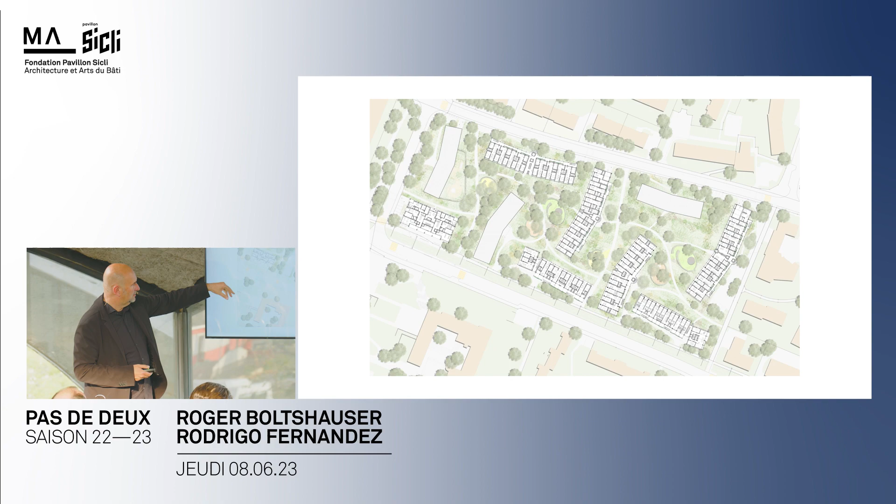But we are there. We still have the earth blocks in it, and it's really the massive big scale together with wood, and it's again, I believe, a nice hybrid structure. We did also the master plan. It's a kind of garden city in Zurich next to Schwammendingen. It's really from Steiner, this plan, and we infilled with these new buildings.

And yeah, again, this design already from the, and of course we show Kilchberg, which we produce with students, and yeah, it's your turn. I'm quicker now.

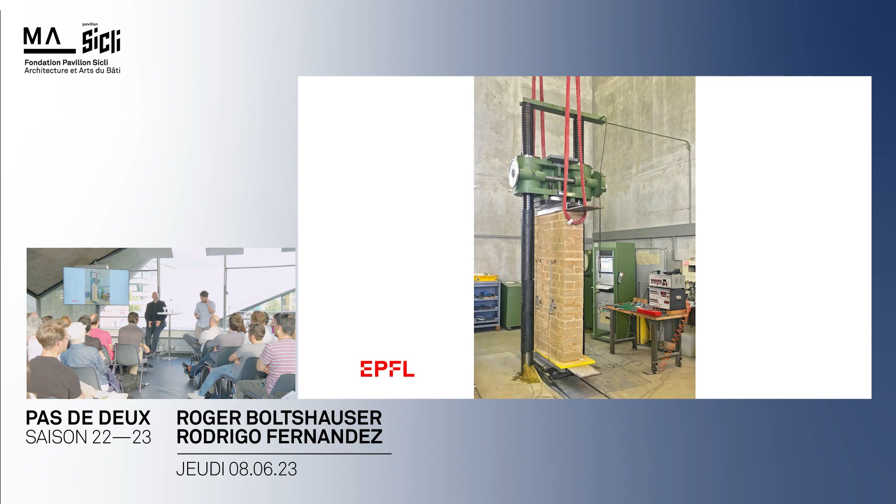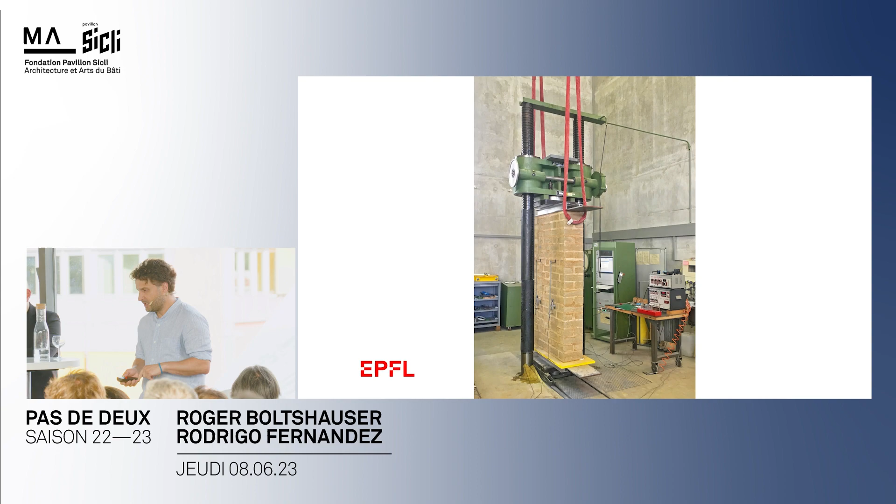So, no, well done. So to try and cope with him, we had to do a lot of testing. This was already 2017 for actually one project of David Reffaut and the city of Geneva that is also here present. And we had to duplicate a lot of these kinds of tests at EPFL and also here in Geneva, to show how much strength an earth block wall can stand. And these are the results for you today.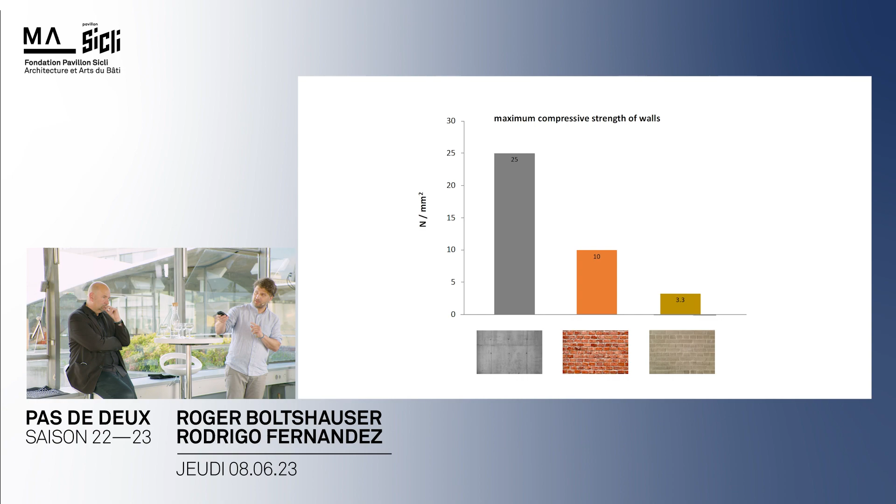Okay, so I just give you the example. I compare the compressive strength of a wall, the maximum compressive strength. You have concrete, you have fired brick, and you have compressed earth blocks. And these compressed earth blocks have a bit of cement inside also. So you see you are close to one order of magnitude smaller in compressive strength than what we're used to build with.

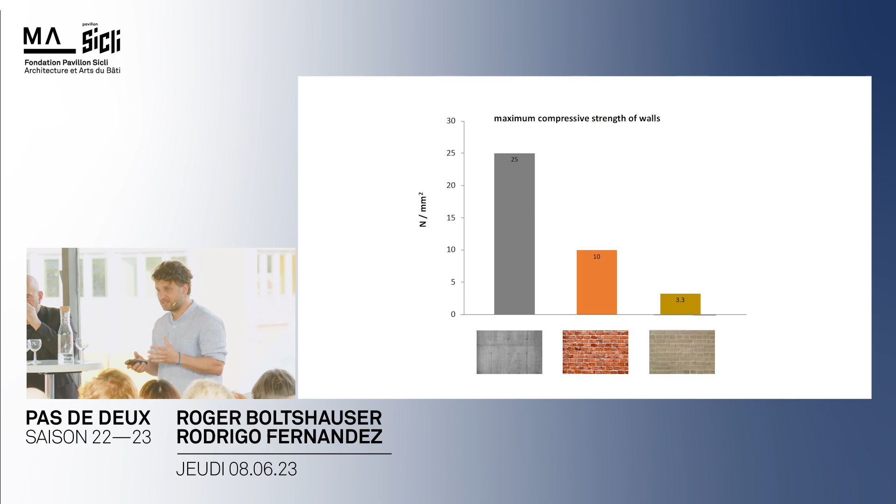So you could think that Roger is crazy because he wants to do load bearing, but actually he has excellent civil engineers, and maybe at the end we are all crazy because we build with the gray one today. We all build too much with concrete, and the idea is that we are over-dimensioning our structures, and there is a way not to under-dimension, but to have a good dimensioning of structure, also with earth, and also to cope with all these new expectations and standards.

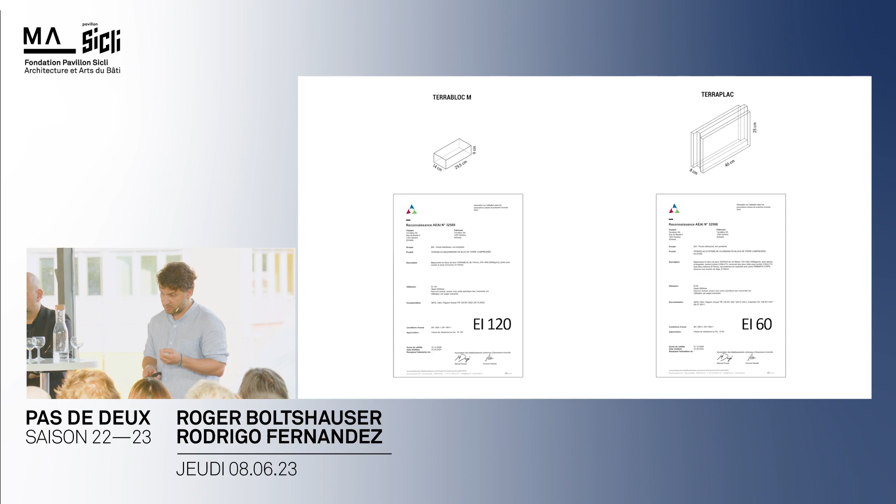We have to do fire resistance tests. This is in Lucerne, where we could show that an earth block wall can stand 2 hours of fire, and it's a whole process to try and go to the bigger scale, because it's not a normalized product in Switzerland yet. And we could have the recognition from the AEAI on several products, and this also takes time, energy, and we always need to find funds to do these tests.

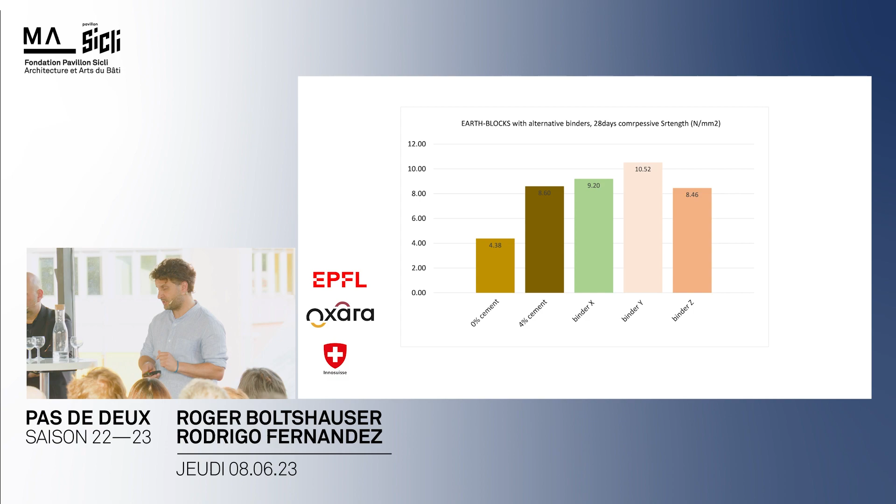Now we finish with research and teaching. On the blocks side, we are looking with the startup company Oxara, but also on our side with an Innosuisse project at EPFL, at alternative binders. Can we get rid of cement and stabilize or not stabilize the earth blocks in order to always reduce the environmental impact per square meter of wall? And we have some exciting results that will come soon.

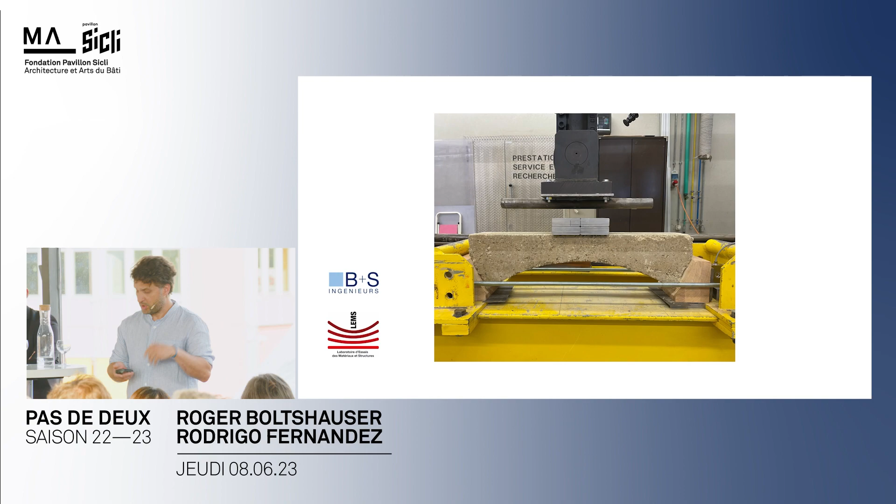And then another project that we are running with B+S ingénieurs here in Geneva, and also the engineering school in Geneva, is to try and make a hourdis, a little bit like Hortus. The idea is to have a block that could be structural, a wood-earth structure, and we are in the development process.

And we have the chance to teach also. Obviously, teaching and showing the students what can be done with earth is fundamental in order to diffuse these earthen materials. So, Roger, you finish with a few perspectives, I think.

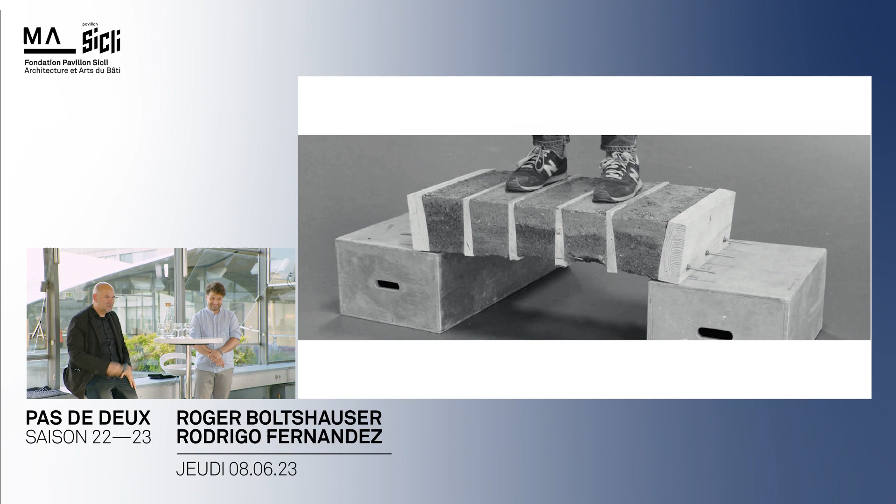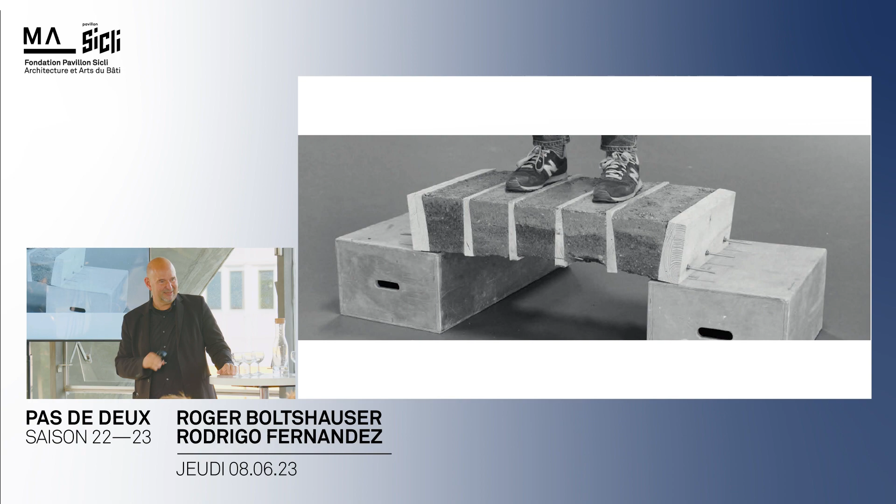This is inspiration from Hortus, because it was in our book, and this is students from the EPFL. So it's nearly the same system. This is under pressure, and the rest is not under pressure. It's a curved shape, but in general, I think it was the inspiration, and a lot of our research is based on that. What we did at the EPFL, we turned it into a compression system.

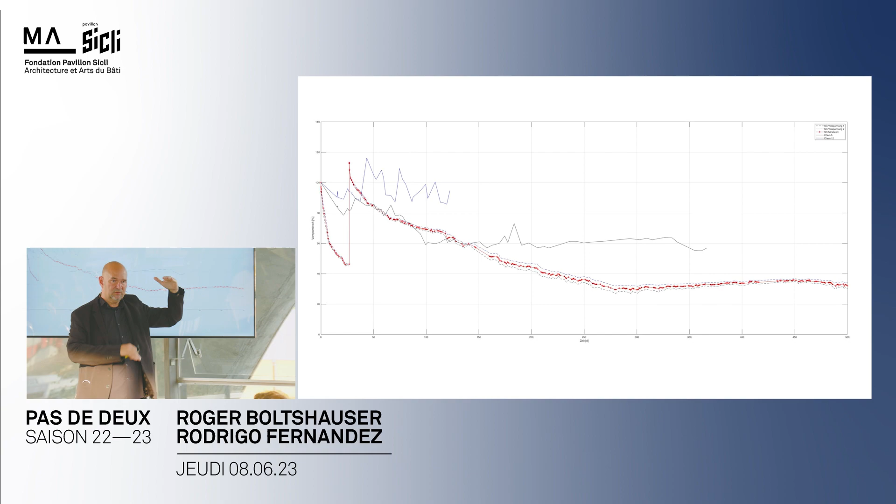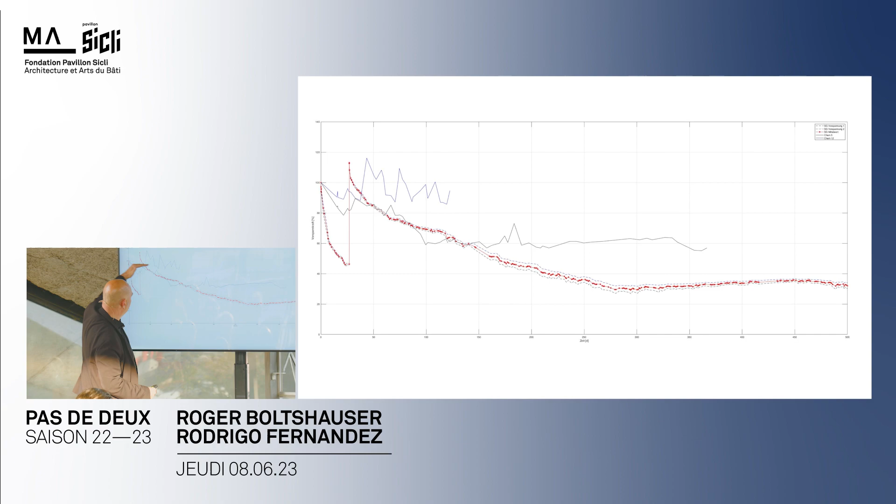This is the EPFL mock-up. We have a lot of shrinking after, and this is the line we had at the EPFL, just to finalize. So it always comes down, then we have to stiffen up again, and then it comes slowly down, and then after half a year the compression construction works. The learning out of that was to have these springs in the construction, and then at the Ofen Tower in Cham we have nearly a flat line from the beginning. So it's in a way like concrete. So this was the learning; we are still measuring, the line is not that long.

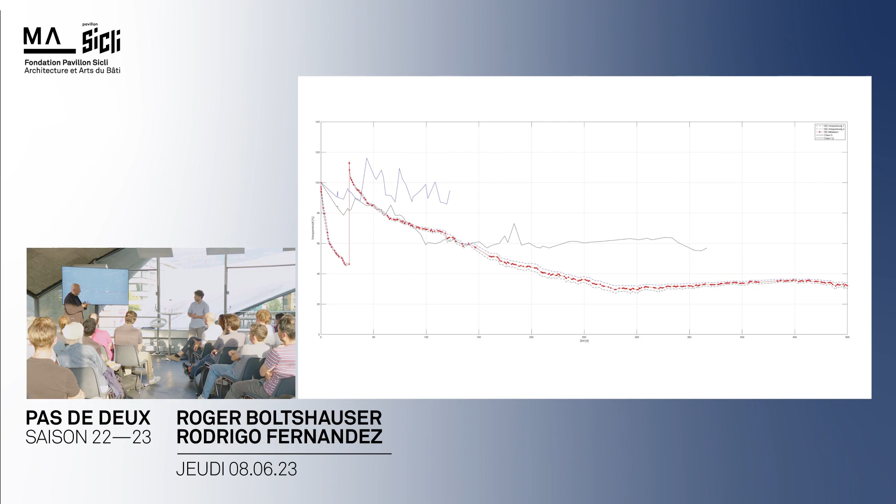But at the ETH we now have a start, we can also do some research at the ETH now. I'm at ETH now, and we get money. And we have an Innosuisse program now, for which we also get money. It's a collaboration with a lot of professors from ETH and also Lucerne and other schools. So we really push this material at the schools now to bring it to another level. And there, of course, are a lot of questions.

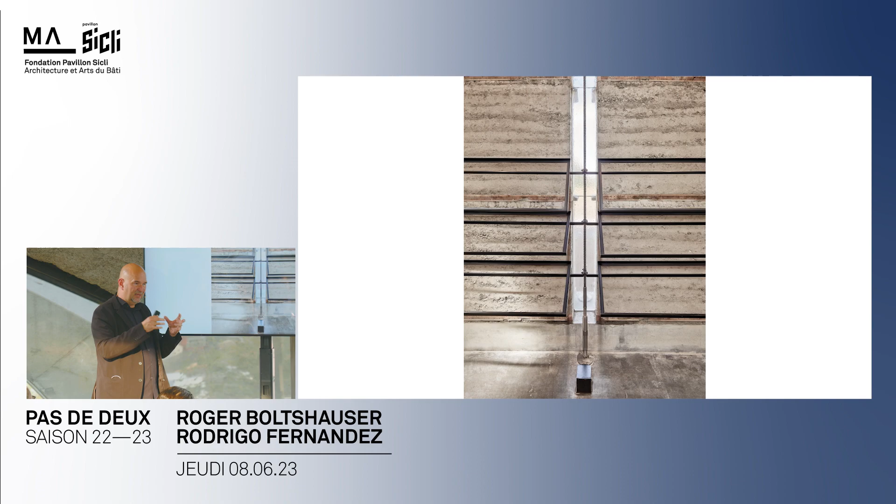And we also think about other systems, like a net system in the block to stabilize it more. We already have 4 times better results for the load with some special net system. So we really try to find other borders for this material, and this we want to do at the ETH. So this is the beginning. At the end, Martin Rauch is always saying we are just at the beginning.

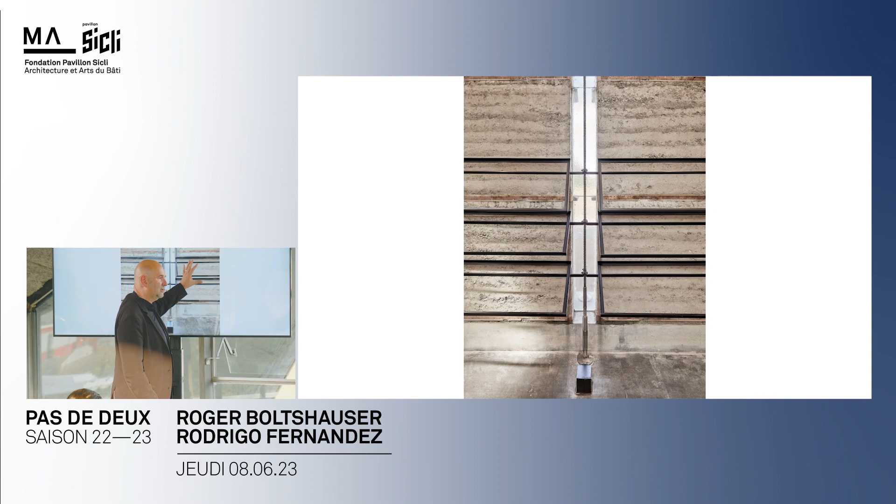We are missing 200 years of research, because that was the time when they started to go on with concrete and steel. And since then, what they did 200 years ago is in a way still the same. So there are a lot of things we have to do to come to the point that this is just a building material everybody can use. So this is what we try, and I hope we can do it with you, because at the end we need a lot. It's a strong effort to not let this material go away anymore. Okay, this is the end? Okay.